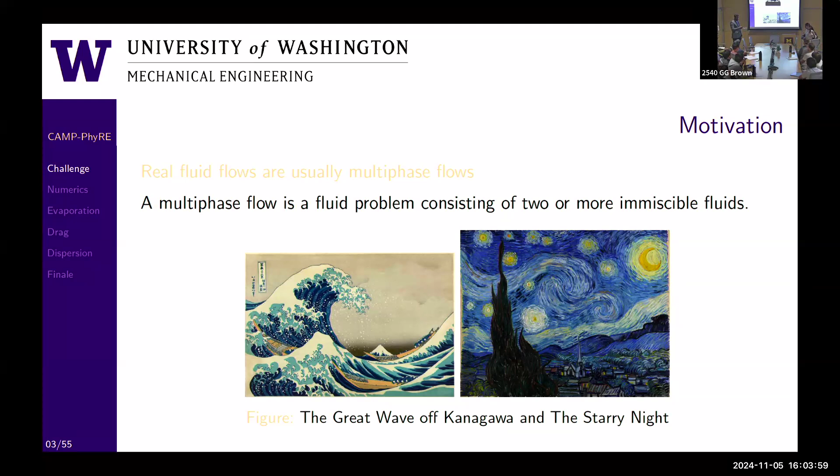In engineering, these occur in a lot of different applications. Most commonly, you'll see this in situations where you need heat and/or mass transfer. I'll list a couple of common engineering applications.

My background is more associated with combustion as it occurs, principally motivated by aviation—you have a fuel which breaks into droplets, and there's gas around it. Fire suppression is another application: here you have water droplets in air.

You can also talk about a lot of chemical engineering systems involving bubbles, where you have a liquid and use bubbles for mass transfer or heat transfer inside the system. And you can even think about blood flow, biomedical devices, biomedical engineering as a multiphase flow—you have a liquid, basically water, with things in it like sugars, cells, and proteins.

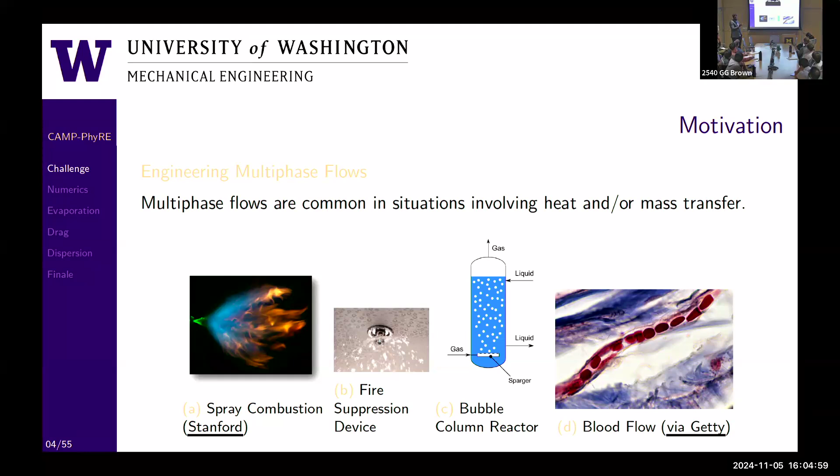My background is more toward the spray combustion angle, so I'll talk about a lot of this in that context. I love this image I've taken from Stanford, where a liquid jet is injected, breaks into droplets, droplets evaporate, and then the vapor, which is a gas, mixes with the air, which is also a gas—that's the multiphase aspect.

And finally combustion results. So this is both multiphase and multi-physics—there's different types of heat transfer, flow dynamics, chemical reactions going on. There's also multi-scale aspects, right?

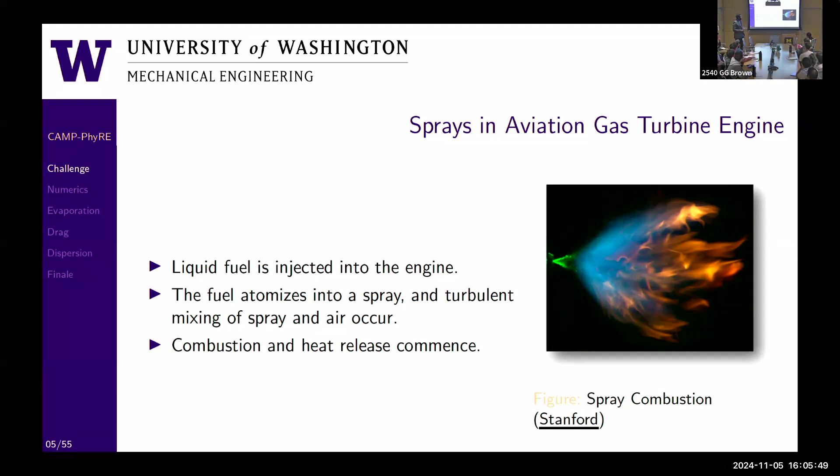It's like the combustor scale perspective of it, but also the scale of an individual droplet, which is much smaller. So multi-phase, multi-scale, multi-physics—a lot of things going on.

A lot of what I talked about in my work relates to the application of sprays. One thing I want to say is that as a matter of practice, we understand sprays by looking at the droplets which consist of the spray, but there's a lot of dissonance between what we know about droplets and what's actually relevant for a real spray.

This slide highlights some of the common points. A lot of the theory of droplets looks at either quiescent or uniform flow around the droplet, but actual spray is turbulent flow. A lot of the theory looks at a spherical droplet, but actual droplets don't necessarily look spherical.

This is a very famous experiment, relatively low Reynolds number too—not even a particularly high Reynolds number outlier type of situation. It's showing the atomization or breakup of a liquid stream into droplets. And if you zoom in, you can see these not sphere-shaped droplets. So droplets are not spherical.

Another common assumption is that there's no flow inside of the droplet, no internal circulation, and that is violated. The shear from the air onto the droplet will induce internal circulation.

Another thing is people are usually looking at isolated droplets—as if this droplet is the only thing in the entirety of the universe, with no interactions with walls or other droplets. That is not accurate for sprays. Sprays are a dense collection of droplets.

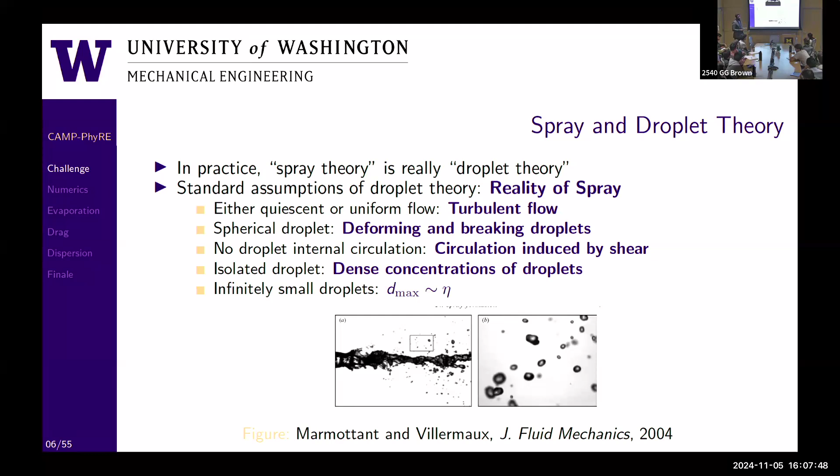And then the other thing, which is kind of subtle, is that either of the theories are assuming droplets are infinitely small. We're going to say, without explaining too much, that droplets can be of sizes that are relevant to the turbulence scale. This parameter eta here represents some type of turbulence length scale, but droplet sizes can be commensurate with turbulent length scales of the flow.

So I'm going to claim that there's a gap in knowledge, let's say, between application and theory. It's largely driven by the fact that we need to know more about droplets, and that's also the goal of what we're mostly studying here.

The foundational idea, or the approach that we have here, is that a lot of spray or droplet theory is basically of the form that your force, evaporation rate, drag, or lift is described by some type of gas phase boundary layer equation. So maybe it depends on Reynolds number. If you're doing heat transfer, you might have something like Prandtl number, a heat transfer number, or a mass transfer number if you're doing heat or mass transfer. I mean, those things are important, but it's not the complete picture.

If you're doing a multi-phase flow, other things will be important that are related to the multi-phase flow: the density ratio between phases, the viscosity ratio between phases, and this parameter called the Weber number, which is related to the shape of the droplets. We showed how those things deform when they're subjected to aerodynamic stresses—that's captured in this parameter.

In general, if you're dealing with a real turbulent flow, not uniform flow, you're probably going to want something that represents the non-uniformity of the flow, like a shear rate. So this is a shear rate. Some of these phenomena have been studied, and what we're doing is improving upon it, systematizing it in a generalistic formulation, and continuing the study in these areas.

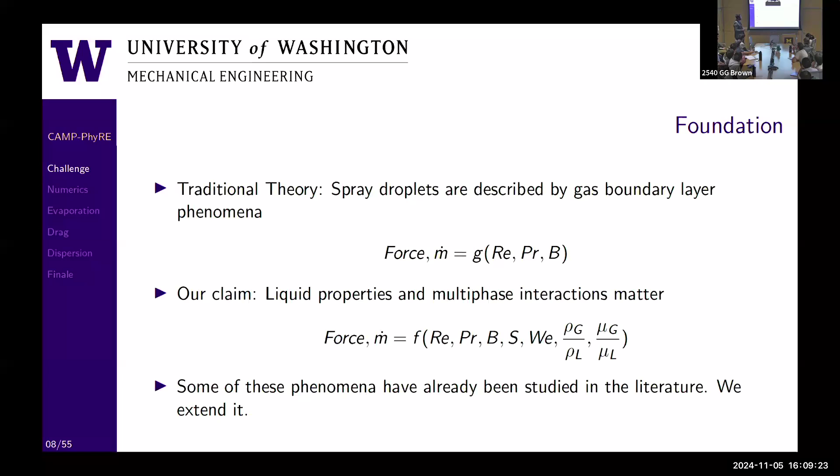How I'm going to break up the rest of this is: I'll briefly talk about the numerical methods mostly developed during a PhD. Then we'll use those to investigate droplet evaporation and droplet drag. And then we'll collect some of those results, think about them, and explore the implications of drag on droplets and their dispersion inside of a turbulent flow field. It'll be homogeneous isotropic turbulence in this case, and then we will be done.

This section is mostly based on my PhD work, just reviewing the numerical method that I developed during my PhD.

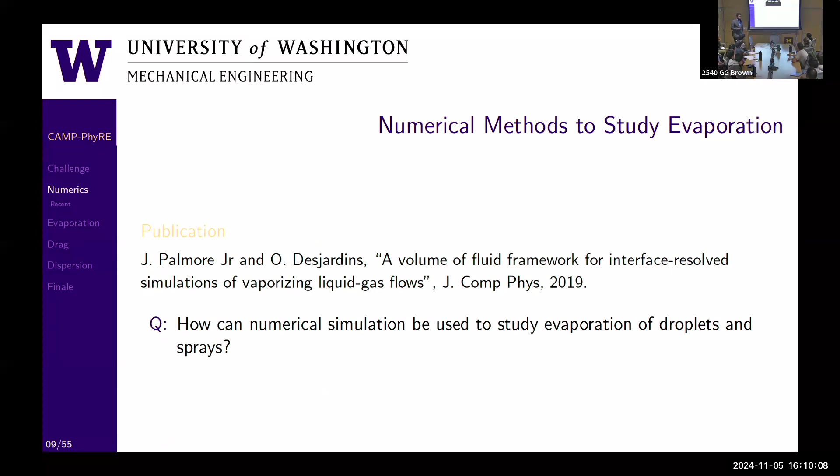So why do you want to simulate spray? We talked before about the fact that it's a multi-scale, multi-physics, multi-phase phenomenon. Compared to experiments, it can be difficult because of the so-called high optical density of sprays, which makes it difficult to use optical measurement techniques. And even if you can make those measurements, sometimes you just want a type of data that's more amenable to CFD, like field data, as opposed to isolated point data.

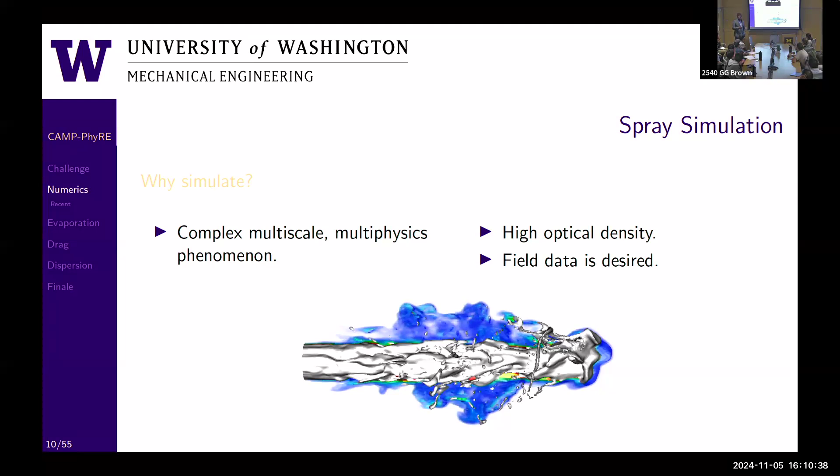Some of the numerical challenges, well, between the two phases, liquid and gas, you got vastly different fluid properties like density, viscosity, et cetera.

This is a 2D slice of a droplet evaporation problem, very coarse mesh, but it's designed to be illustrative. If you look at the pressure field here, this is the droplet, this is the inside of the droplet, this is the air around it.

So if you look at the pressure field here, you can see the pressure is discontinuous at the liquid-gas interface, and that's due to the surface tension. So there are discontinuities in fields such as the pressure. If you look at the velocity, which is the other side, velocity is also discontinuous.

What happens is that evaporation introduces the so-called Stefan flow, Stefan blowing, and that's going to introduce a discontinuous velocity. So you have major discontinuities in your momentum equation from the pressure, and also the velocity itself is discontinuous, and then all of the fluid properties are also discontinuous at the interface.

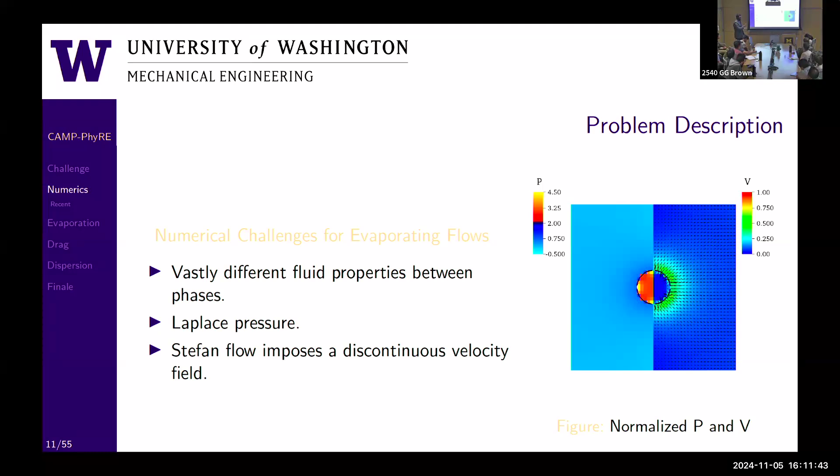For resolving this, our fundamental philosophy was to err towards the side of discrete conservation. If you're familiar with finite volume numerical methods, you might know what some of these things mean. If you're not, it's not super important, we'll just go through these things quickly.

I use an unsplit geometric volume of fluid method for liquid tracking, or liquid indicator, that has a property of being bounded and discretely conservative, which again is a relevant property that you want to have.

We built it on the NGA code, which was a solver that discretely conserves the mass, momentum, and kinetic energy in each phase separately. For the phase interface, you had to implement a lot of fixes to be able to deal with that in a way that was accurate and stable.

So we chose a mass, momentum consistent dissipative scheme to use at the interfacial cells. And then for the pressure solution, we used the ghost fluid method, which allows for a sharp representation of the pressure discontinuity instead of spreading it out over several computational cells.

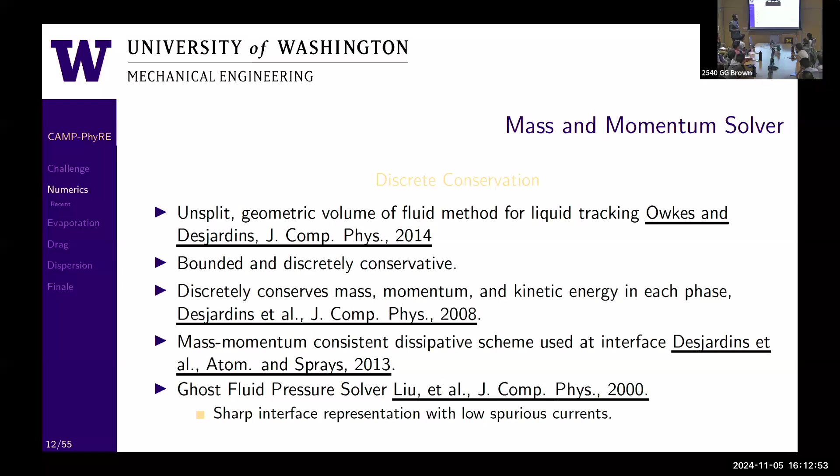For scalars like temperature field and vapor field, we use an approach called BQuick, basically, which is based on the quick scheme, which is third order accurate. But then at locations of discontinuity, it degenerates to a first order upwind scheme to maintain stability. And then for most of the diffusion operators, we just use second order central difference schemes.

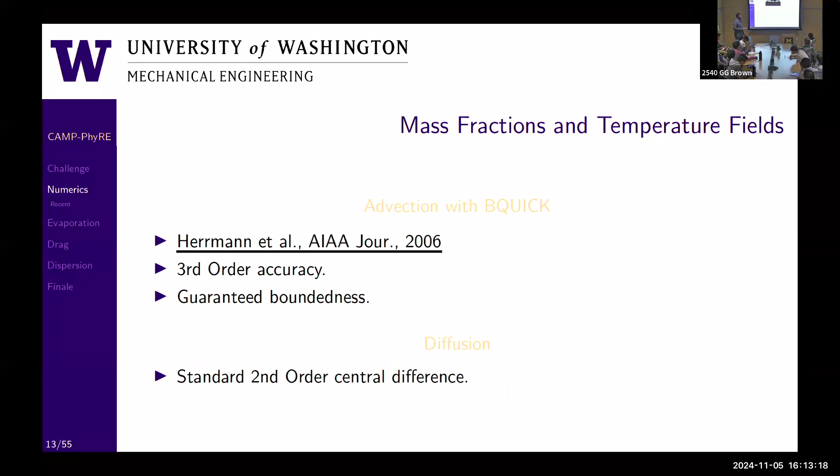So really what I actually spent a lot of my PhD thinking about was what is M dot, being the evaporation rate. So I'll talk about that here. The idea is evaporation rate can be predicted from the energy conservation equation or from the mass conservation equation. In reality, both of these things have to be satisfied simultaneously.

There's an additional relationship where the temperature and the vapor mass fraction are linked through some type of thermodynamic equilibrium relationship, like the Clausius-Clapeyron relationship at the interface. So all three of these equations have to be satisfied simultaneously. If you stick them together, you get this nonlinear solver that you have to solve that will simultaneously give the evaporation rate, the temperature, and the mass fractions.

We spent some time investigating this and looking at various strategies, understanding which one is more or less accurate, which one is more or less stable, which one is more or less robust, et cetera, et cetera. So I spent a lot of time doing that.

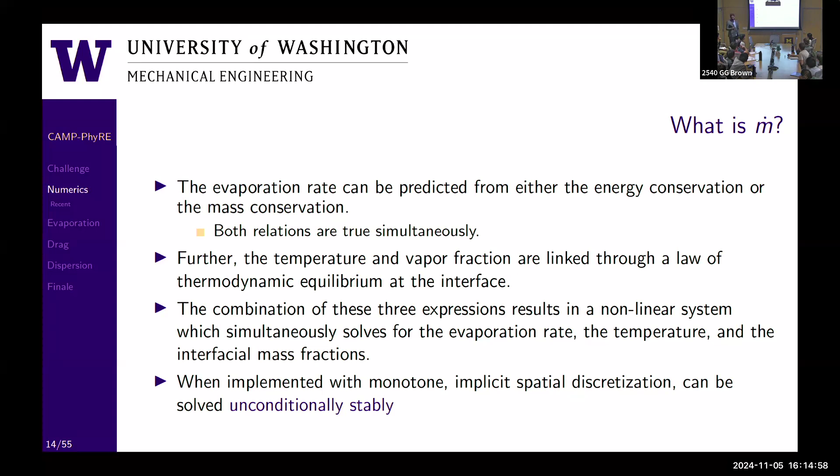Based on how I implemented it, I was able to get a scheme that was not only stable enough, but was unconditionally stable, and not just theoretically unconditionally stable. If you're familiar with numerical schemes, you'll know you can easily prove that something is supposed to be unconditionally stable, but then if you actually try it, it doesn't work for high values of your parameter, which I'll call the CFL number. I actually tested this at CFL numbers of like 16,000 or something, and I was still seeing good results, so I was like, okay, this is actually unconditionally stable.

Okay, so then results: unconditionally stable, proven convergence against analytical solution, first order. At the time, people were not even proving that their schemes converged, they were just like, yeah, we have evaporation, great. So we were proving actually that we can converge. First order is better than not proving any convergence at all.

Our convergence was in the infinity norm, meaning the maximum error was actually converging. Most people look at the average error, but if you zoom in, you'll find the error is decreasing far from the interface, while near the interface, the error is not converging at all.

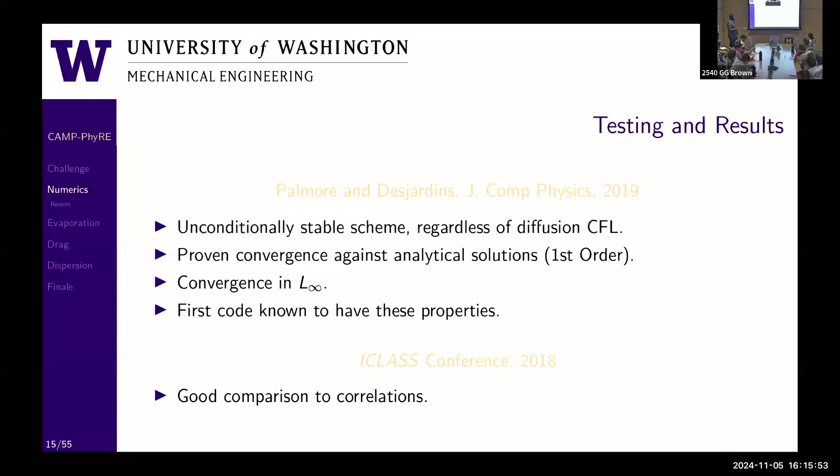Very nice, and I did some further validations later. Okay, so that was the numerical scheme. Now for the rest of the talk, we'll talk about how we use the schemes, not necessarily the numerical details.

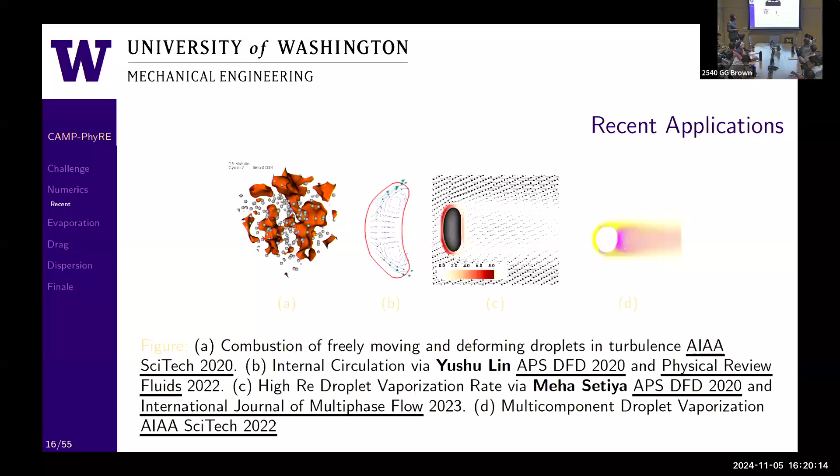Okay, so the next part is mostly work from Meha, looking at droplet evaporation. Basically this type of analysis, trying to understand how the fact that the droplet is not a perfect sphere is affecting the evaporation.

So to start off, I actually investigated this analytically. I enjoyed doing that, it was fun, I learned a lot of math. The key thing here was I investigated the effect of the shape on the evaporation.

The shape is mostly governed by the Weber number, which is the ratio between aerodynamic and surface tension stresses. Zero Weber number is basically a sphere. Larger Weber numbers, you see them deform into more complicated shapes and eventually break into smaller droplets.

There's a lot that's known about droplets, including that at small Weber numbers, droplets tend towards being ellipsoid-like shapes. This has been studied. However, the real droplets are not actual ellipsoids, they're just ellipsoid-like shapes. So I was curious about how the results would change if we did something a little bit more realistic rather than an ellipse.

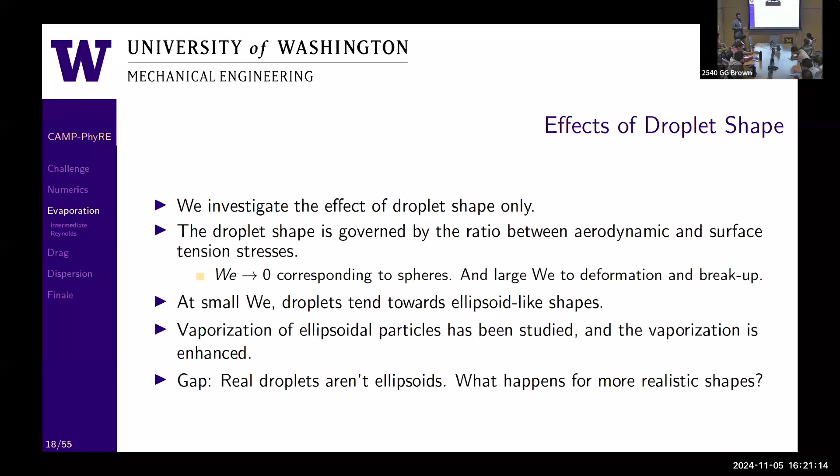Again, I did this analytically. So I solved the steady state version of heat transfer combustion equations in spherical coordinates. I assumed that we had axis symmetry, so this is really just a function of the radius and the angle.

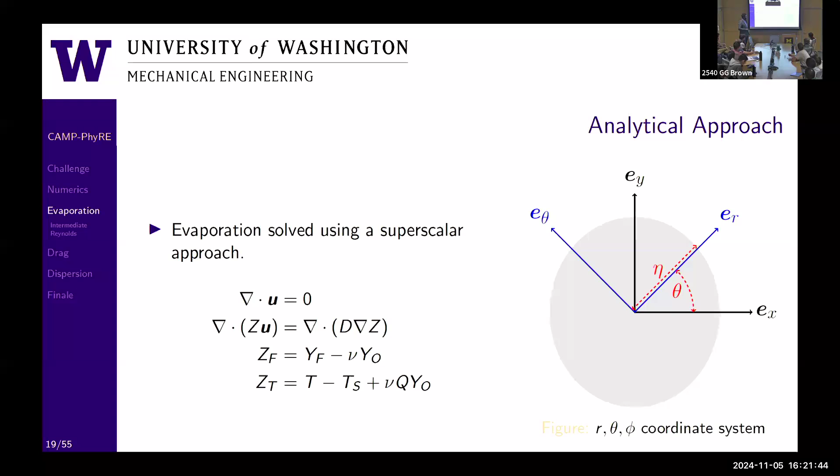To describe the interface, I have this parameter eta, which is basically like the effective radius as a function of the angle. So here eta would be smaller, here eta would be larger, like this type of thing.

And then I can write eta using spherical harmonics. This is a perturbative strategy, so I have a perturbation parameter epsilon that I use. I'm assuming the shape is nearly spherical, but it's not spherical.

I don't have to assume that the droplet is symmetric, which is an advantage over ellipsoid modeling, since real droplets actually are not symmetric. This is known.

With the simplifications I gave, spherical harmonics can be expressed really using Legendre polynomials, which is what I got to here. And then a key aspect was I used this existing solution by Taylor and Acrivos, who had done a separate study for a droplet free falling at low Reynolds number.

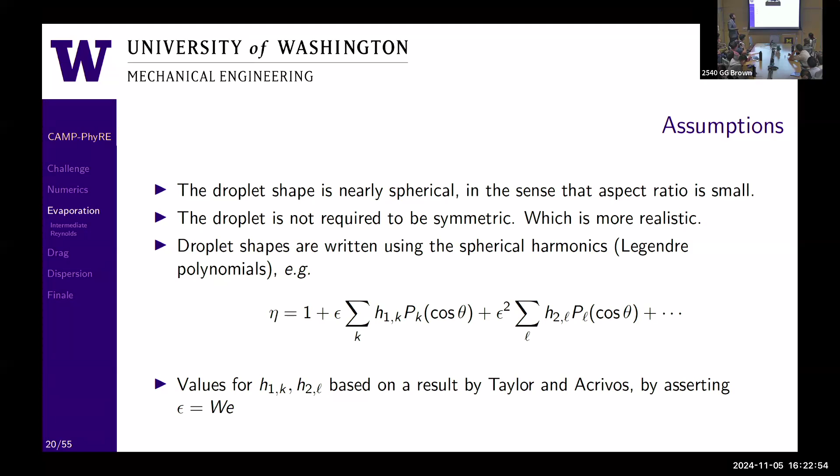They basically found out what these parameters H should be for that situation. So if I make my perturbation parameter be the Weber number, then my study lines up with theirs, and I can use their results to start. That's what I did, and I got this type of result.

Non-spherical droplets vaporize faster than spherical droplets, specifically this equation, where this is the solution for a spherical droplet. And you can see this function of Weber number.

Some interesting things about it: there's no first variation term, I thought that was interesting. The enhancement is quadratic, or it starts off as quadratic and has a cubic term, so there's no linear term.

I liked that the result in the end was something that could be written only in terms of Weber number. You didn't need to do some fancy integral of the angle or anything like that. Weber number is a very easily measured parameter just using the fluid parameters and velocity.

So you don't need to, like, if you wanted to actually compare it to an ellipsoid, you have to take photographs or something in order to understand how it's deforming. With this theory, you can just use the Weber number.

We also investigated the reason why vaporization was occurring, and one of the results was that the enhancement of vaporization is not related to the change in area. It's specifically related to the local interface curvature of the droplets. This was all shown from the analytical theory.

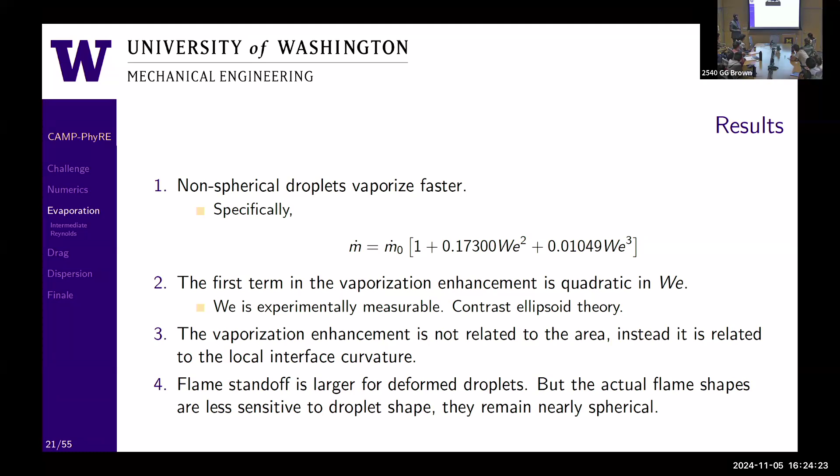I kind of spared you showing all of those things in detail, but you're perfectly free to read the paper if you want. It also did some results for flames, as in combustion. So using that, we went on to actually use

our numerical method that I talked about before to investigate the question of: well, asymptotic theory is correct for small Reynolds numbers, small Weber number. What happens for a larger Reynolds number, larger Weber number, that might be more realistic to a real system? So that's what we used the high fidelity code for.

This student, Meha, chose to investigate this for n-decane, which is a common fuel surrogate, used for both gasoline fuel surrogate and aerospace fuel surrogate. We investigated this at a particular condition for pressure and temperature, meant to be closer to an aerospace type of configuration.

We wanted to do this, but we also didn't want to do a naive parameter study because these are very expensive simulations. So we had to think about what phenomena were controlling the physics of this problem and limit ourselves to investigating the ones we thought were most relevant.

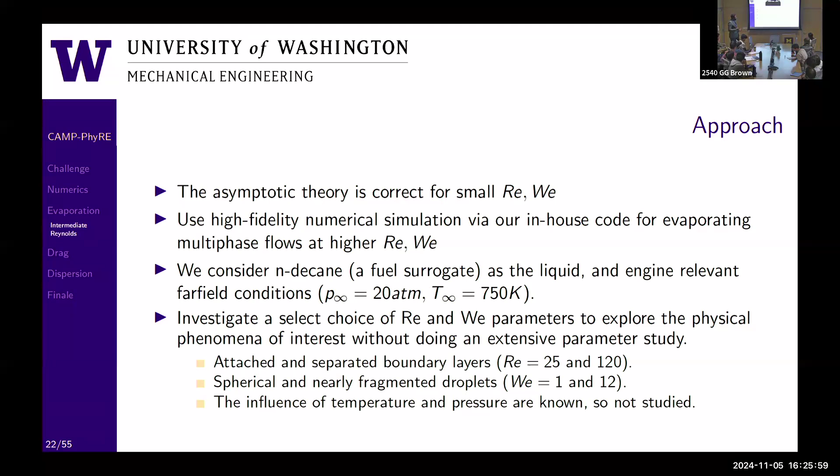We thought maybe boundary layer behavior was important, so we chose a couple of key Reynolds numbers. Reynolds number 25 is for a sphere we thought would be fully attached, and Reynolds number 120 for a sphere we thought would be basically fully detached. For the Weber number, Weber number 1 is very close to being a sphere, and Weber number 12 is about the largest you can get without the droplet fragmenting. So we looked at a couple of Reynolds numbers and Weber numbers within that range.

This is the configuration. I have a droplet inside of this domain. It's initially spherical, and over time, due to aerodynamic stresses, it's able to deform. Airflow is going that way, and we've made gravity in this direction. The strategy mimics the free fall of a droplet at terminal velocity, so the gravity in the simulation is arbitrarily chosen so we can get whatever terminal velocity we want.

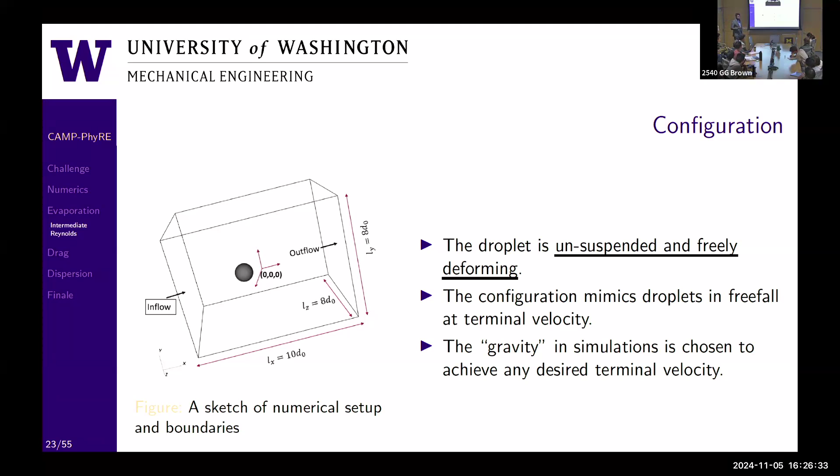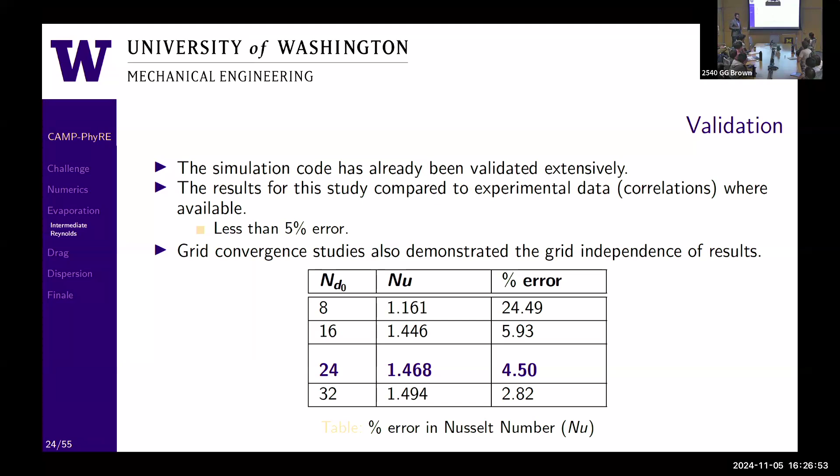She did some validation comparing a result for a spherical droplet, a low Weber number droplet, to existing correlations, and got reasonable error depending on the mesh size we were using. So we felt our mesh was refined enough that we could use it to do additional studies, and we went on to do them. This is a summary of our result.

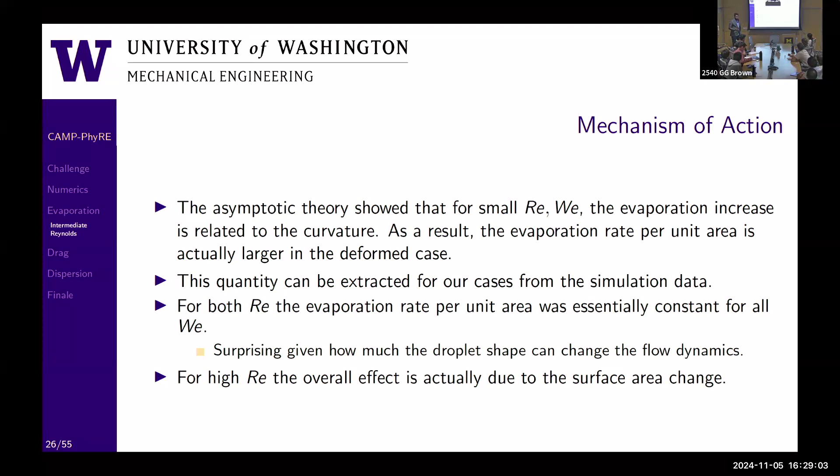That's okay—let's just work to explain what we actually have here, not try to shoehorn our beautiful theory into it. So we investigated this in more detail, and what we found was some type of balance between interface curvature and boundary layer separation.

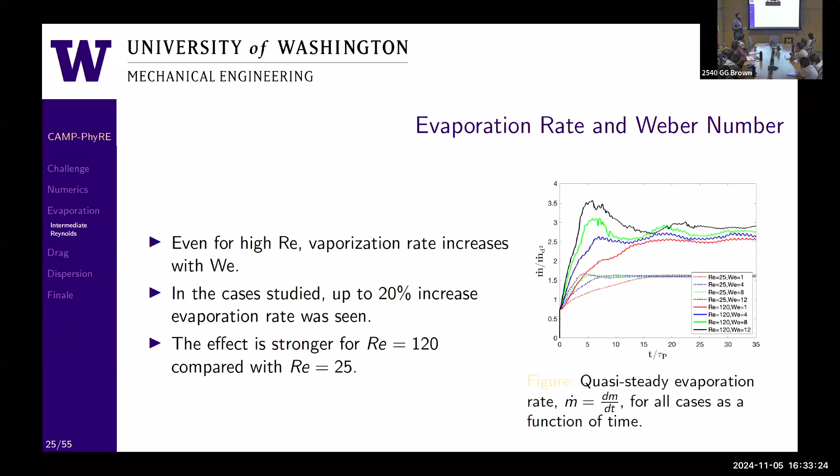One thing I didn't say, which is probably important, is that because this is numerical, I can evaporate without losing mass. I can basically turn off the mass loss of the droplet. So these droplets all have constant mass even though they're evaporating. That way we're not running into an effect where one droplet evaporates faster than another, and because of that has a different effective size. So we don't know whether it's the size, the surface area, or the curvature causing the effect. We eliminated that by doing this type of quasi-steady evaporation.

Any other questions about this part? Yeah, I imagine there are other parameters though, there's Weber number, but there's gotta be Schmidt number too, right? The effect of the diffusivity of the scalar. So how do you choose those parameters? The reason I chose Reynolds number and Weber number - Schmidt number is important, Prandtl number is important - but taking it back to the theory we already demonstrated, people already treat those as important parameters.

So the purpose of this was to show how the multi-phase aspects add something to it. But there is some dependence, because that'll control the gradient. Yeah, so those parameters are important. Those are just fluid property parameters.

As long as we ran the same density, viscosity, diffusivity, which is true because we're using the same fluid, you'll get the same trend regardless of what those are, because you're just isolating the deformation due to the surface. So those are important parameters, but we use the same fluid properties, so those are automatically constant in this situation. Really this is just demonstrating the importance of some of the other parameters, like surface tension, for predicting this.

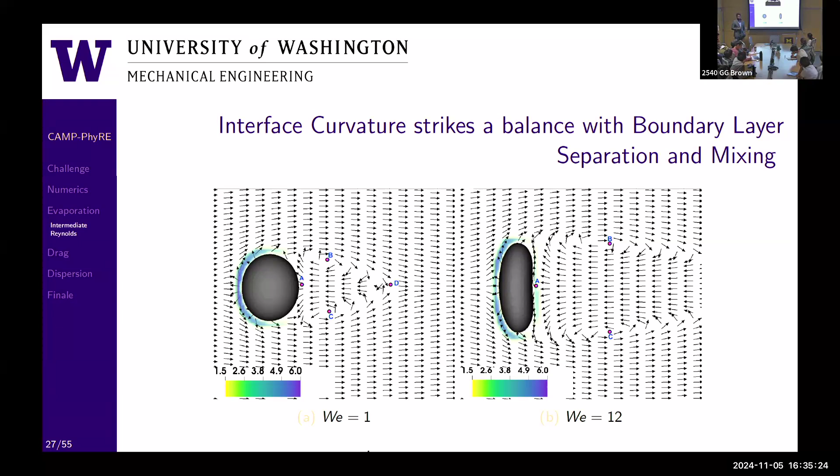Yeah, so I'll go on. This is the result, okay, we don't need to summarize it, we just looked at it.

The other thing we looked at was droplet drag. It seemed obvious in retrospect after doing the study, but when we were doing the droplet evaporation studies, we found the droplets were moving around in ways we didn't anticipate, and we couldn't get them to have the terminal velocity we expected. That inspired us to think about how the drag itself is being changed by these same parameters we were investigating for evaporation.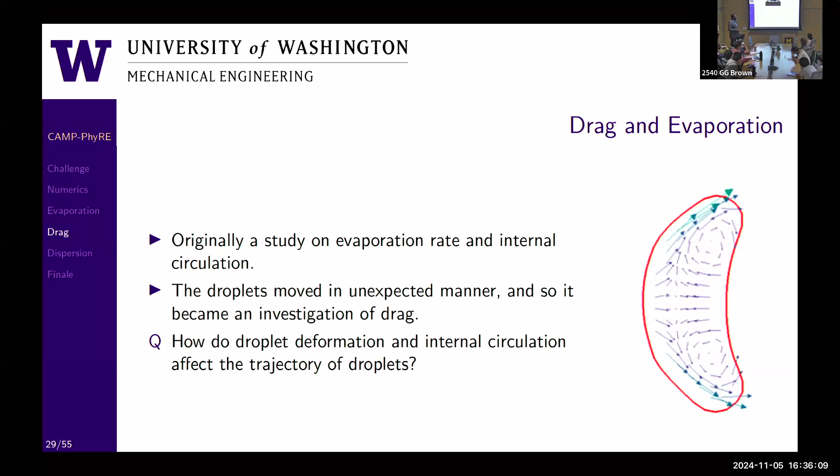Okay, and my student Yushu has been doing a lot of work on this, same configuration essentially. I like going to theory, so this is a theory that Yushu kind of came up with. He was taking a class on interfacial mechanics and had to do a class project, so I said, can you make your class project relevant to the research? And he said, you betcha, here it goes.

This ended up being published along with other things in Physical Review Fluids, the APS journal. So what he's saying here is that to calculate the drag coefficient of a deforming droplet in an effective manner, you probably need to know what shape it actually is, which you can characterize by an aspect ratio, or if you assume it's nearly ellipsoidal, instead of aspect ratio you can use the eccentricity.

From an energy perspective, you have the gas inertia and the liquid inertia and the surface tension forces, or surface tension energy, all balanced. Then he writes these expressions, and making various substitutions and rearrangements of all of these, eventually he gets this, which is a nice equation.

What we're showing here is the relationship between the Weber number, the eccentricity, and also the density ratio that we talked about before, and the viscosity ratio that we talked about before. Interestingly, these two parameters seem to be grouped together in such a way that they are equivalent to the Ohnesorge number, if you're familiar with what that is.

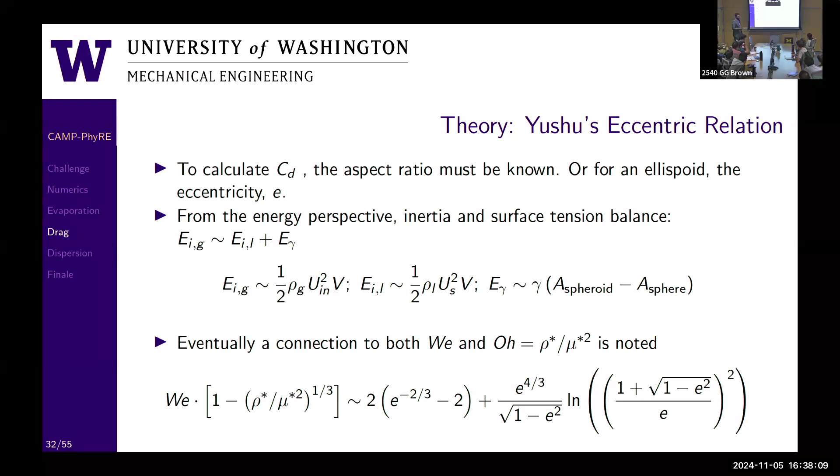So based on this insight, we were doing some simulations and we tried to actually investigate some of the effects of those parameters. So he, in this case, looked at the density ratio and the Weber number.

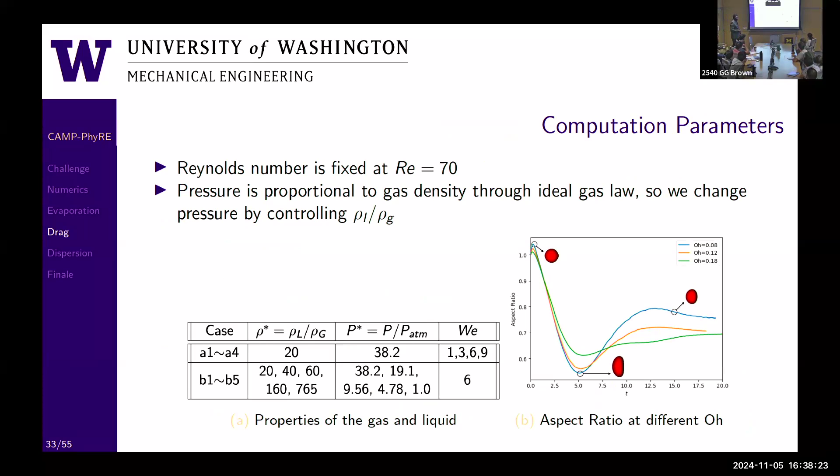The reason we looked at the density ratio is because changing the density ratio promotes internal circulation inside of the droplet. And that naturally leads you to ask the question, how do you measure the internal circulation?

Originally we looked at the maximum velocity. Maximum velocity is a very sensitive parameter. If you just check maximum velocity, you'll see a lot of anomalous spikes and dips. So we needed some average parameters that can measure internal circulation.

So we looked at several of these in our AIAA SciTech conference paper: mean vorticity, mean absolute value of vorticity, enstrophy, and a parameter I made up called Hill's constant. If you're familiar with the Hill solution to spherical vortex, that solution has a certain constant related to the vorticity that describes basically the entire flow field.

If you assume that's accurate even for non-spherical droplets and use the same strategy, you can back it out and solve for that constant. So I call it the Hill constant.

We're still not convinced what's the best way to measure internal circulation, but we're seeing this monotonic trend in all cases, which is what we actually care about. So you have black, red, green, orange, blue — in all cases you're seeing a monotonic trend that as you change the density ratio or pressure ratio, there's an increase in the parameter, and all of them have the same monotonic trend. So without discussing which one is the best measure of internal circulation, we can clearly see there's a clear relationship between density ratio and internal circulation, which is what we wanted to prove.

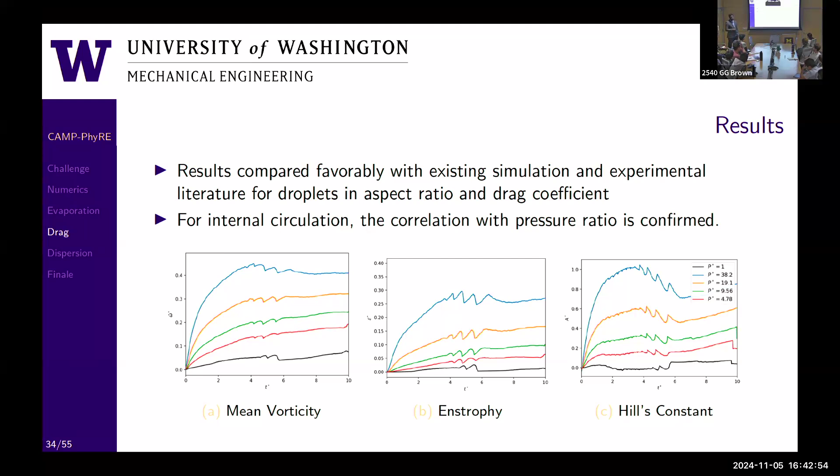Well, it's good. So we measured the drags, and what we saw, if you look at the raw data - dashed lines are raw data, solid lines are corrected data - we saw a significant effect, in this case of Weber number or droplet shape, on the drag. But if we measured the actual frontal area of the droplet and normalized it, then all of these curves collapse. That's actually kind of weird because we still use the drag coefficient of the sphere to calculate this, but we didn't use the drag coefficient of the disk or anything like that. It's actually kind of weird that they collapsed so well, but apparently they did.

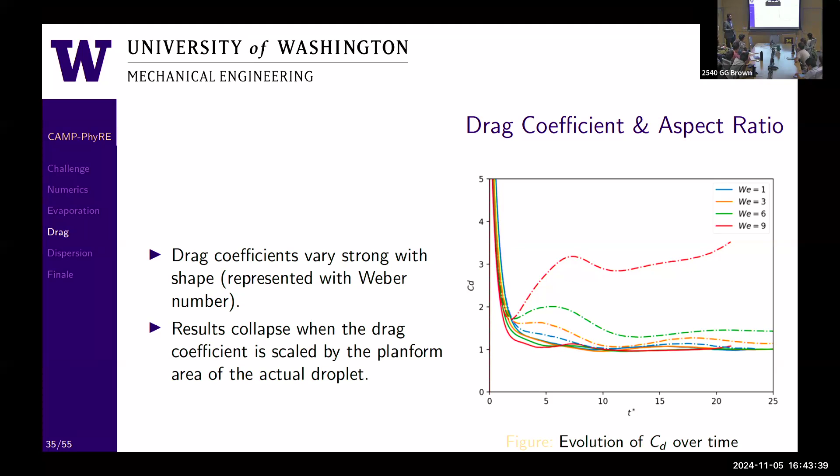And we tried to do the same thing for our study of internal circulation, and you can see a similar result, but the collapse is not as great. So there's more variation. There's something else that is important that's driving the drag effect for internal circulation. It's not merely the shape of the droplet.

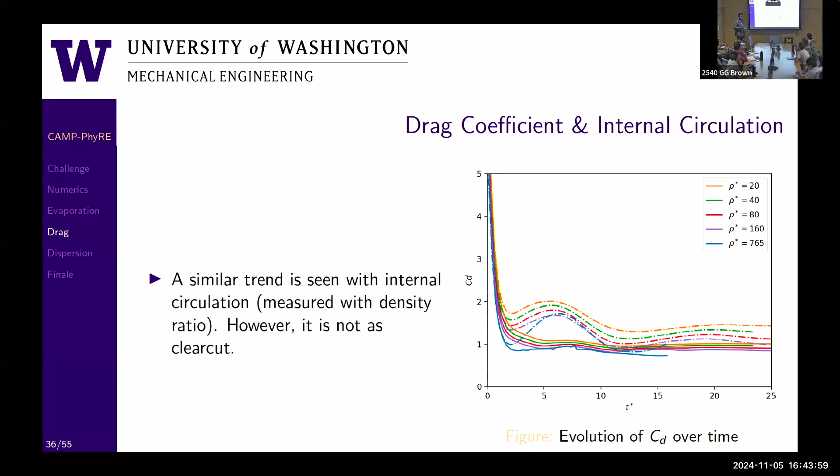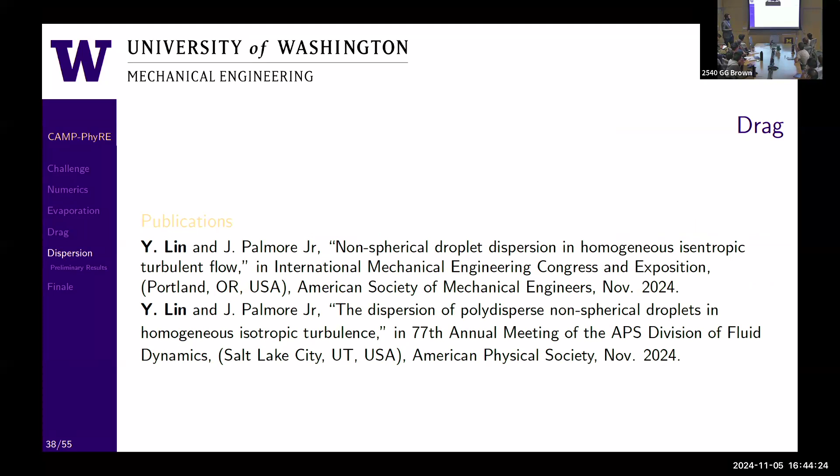Okay, so I see that I'm getting close to the end of my time. So I think really what I wanted to talk about today was a more recent work of the same student, Yushu, and how we've expanded that. He has this paper at ASME soon in Portland, and then also at the upcoming APS conference. The idea here is that we're going to take some of those results and understand their implications in turbulent flows.

For example, we know the droplet deformation increases drag. Well, what that's going to mean as a practical matter for spray is the trajectory of droplets is typically miscalculated in spray - the physical location of the actual fuel is not known. Because the droplet deformation increases the droplet evaporation rate, that's going to mean that the vapor concentration and vapor mixing are miscalculated, so the combustion is not known.

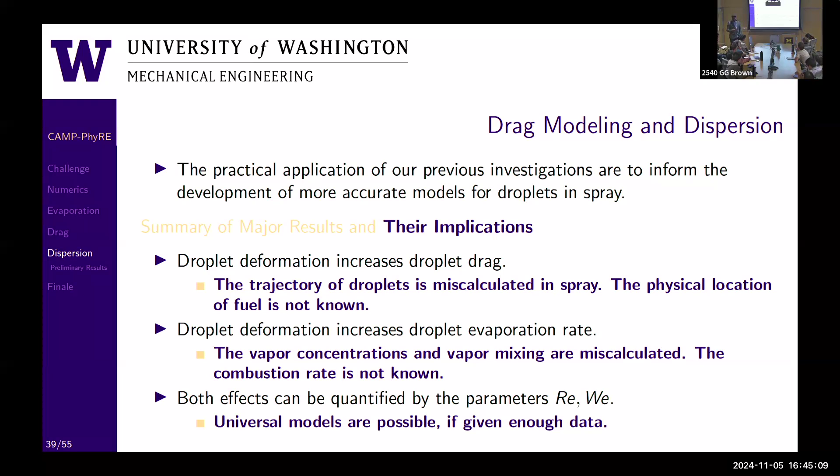And then the other thing we kind of notice is that these effects can be quantified by parameters like Reynolds number and Weber number. That means we can have universal models of this - universal meaning basically non-dimensional number models of these things. So what we did here was we took one of the drag models for non-spherical droplets, and we put spherical droplets in homogeneous isotropic turbulence and freely deforming droplets of the same size in homogeneous isotropic turbulence, and then compare their dispersion.

Okay, and to talk about the dispersion, we introduce a couple of parameters that are probably well known to people who study particle-laden flows. So we have the particle autocorrelations, and we have the dispersion, or the mean square displacement, which you can calculate from the autocorrelation.

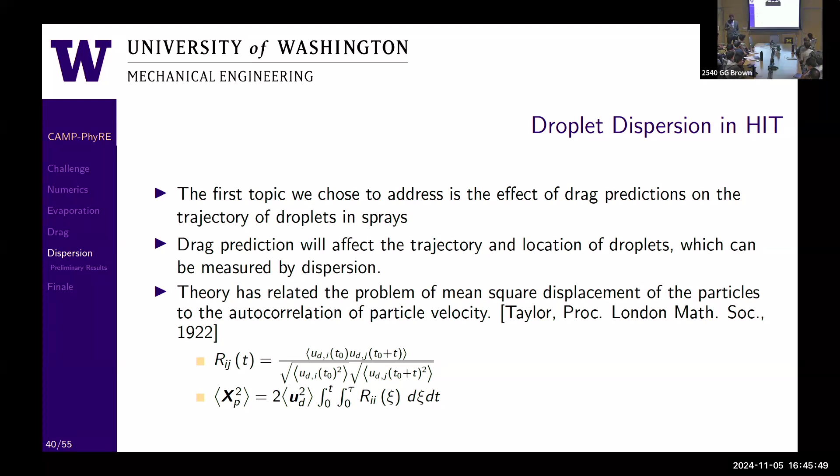Okay, and in this case, we solve the droplets using a Lagrangian particle simulation approach rather than an interface capturing approach, if you're familiar with that. In that situation, the gas field satisfies standard Navier-Stokes equations, whereas the liquid field is considered to be isolated droplets that satisfy something more like Newton's law: the position derivative is the velocity, mass times acceleration is your force. In this case, the only force is the drag. So the force is the drag.

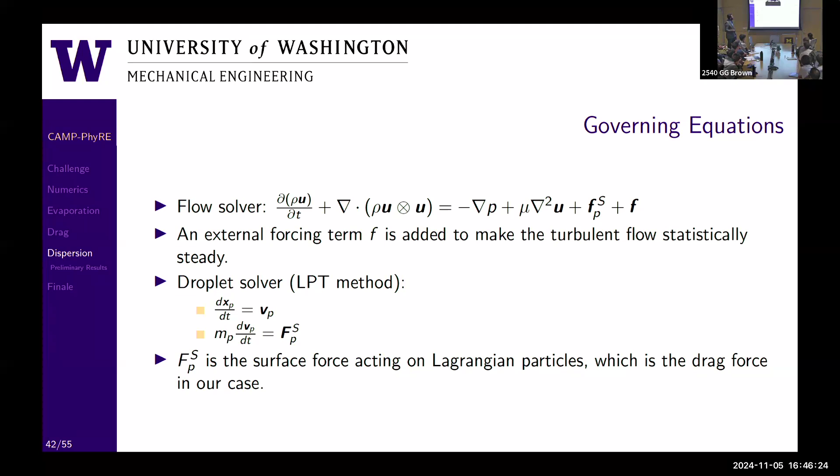For the drag, we took the classical Schiller-Naumann relationship to represent spherical droplets. For non-spherical droplets, we used an existing simulation database from Hellenbrook and Edwards to get a drag correlation, where the drag depends on the aspect ratio, the viscosity ratio, and the Reynolds number of the droplet. The aspect ratio itself is a function of the Weber number, so that ties it back into everything we've done previously.

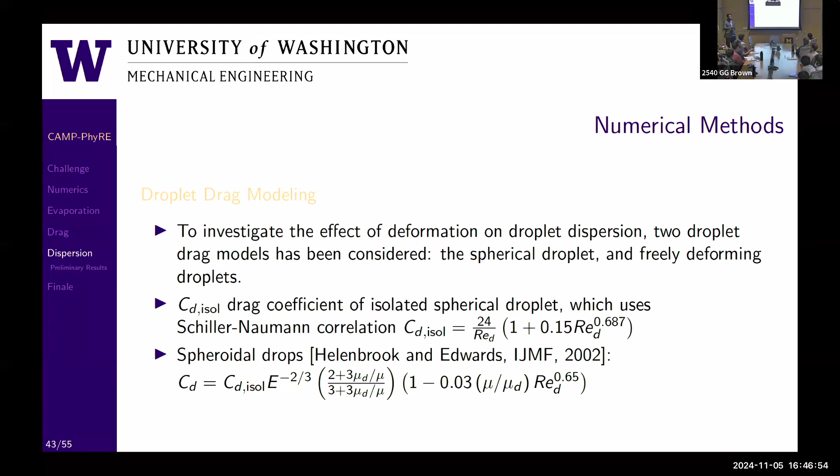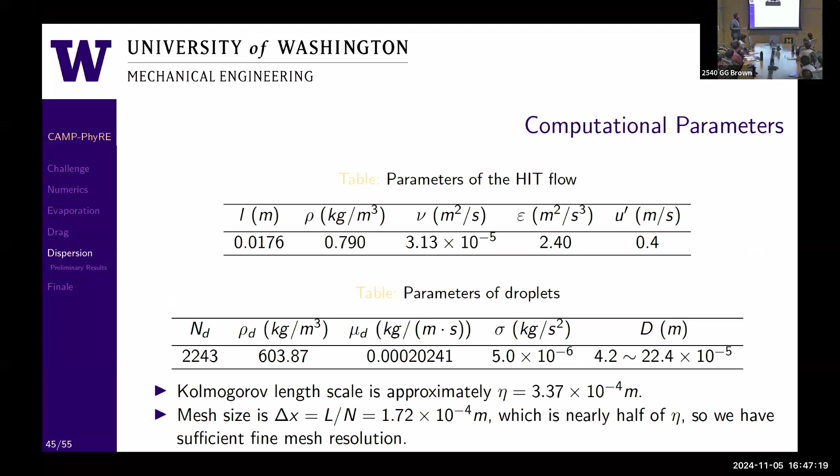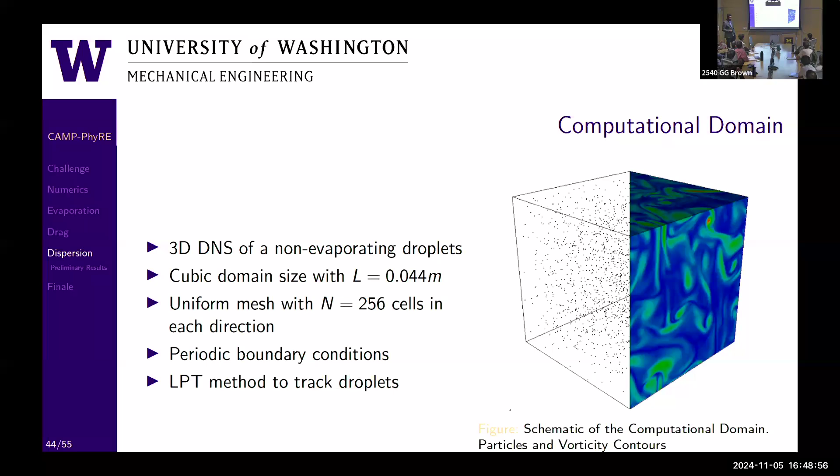We aren't quite sure how to interpret the data beyond this yet, or even if it makes sense to interpret it beyond this, but we decided to show it. Maybe some of you have some ideas.

So what PK Yeung does when he looks at dispersion is he has periodic boundary conditions for the fluid, but not for the particles, so they escape and disperse out. As they move further out, you always know the fluid velocity field because it's periodic. You have an initial clump of particles dispersing out, and you can go indefinitely outward. You just don't apply the periodic boundary conditions to the particles, and when you know the particle location, you can figure out the fluid velocity by knowing the periodic length of how far it's going.

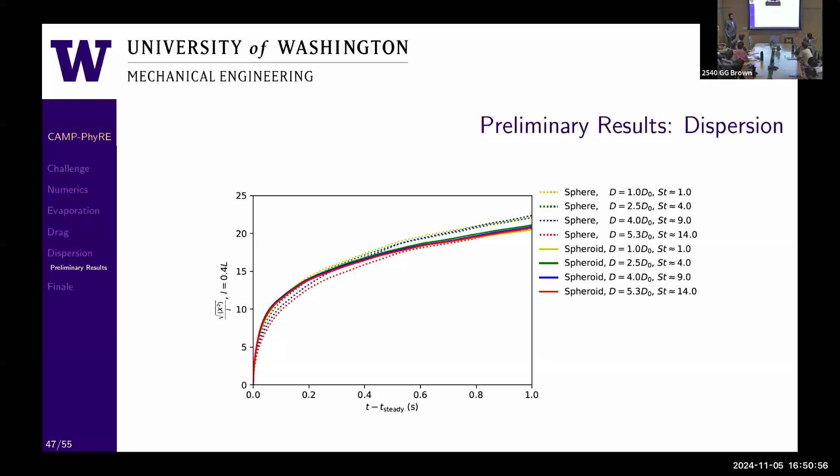That's interesting, we might actually do that. There might be some way of saving this data. You could use the exact same data, you just have to not image it back, but you have to know if the particles did pass. It actually might be tricky. This is a four-way coupled simulation, isn't it? Yes, this simulation is four-way coupled, so that won't work in a four-way coupled setup—you need to treat the force on the particles. That's right, it would only work with one-way coupling. I see, that makes sense. So what you'd do is have a big domain, start particles near the center, disperse out until they reach the boundary, and remove them once they leave. Yeah, this is why we're here to discuss this type of thing.

Sorry, the spheroids—are they dispersing faster? Yeah, the spheroids, those are the ones that are not spheres. Yeah, maybe we should change the terminology. But it must be due to alignment, right? Is that what you're getting to?

Yeah, we still aren't exactly sure what causes the dispersion. So you're saying people look at rods in turbulence, they tend to align preferentially. That could then affect their local drag, so you can imagine particles sampling different parts of the turbulence, aligning and moving faster out. If you're capturing those effects, that might be what it is. Yeah, that's a good hypothesis.

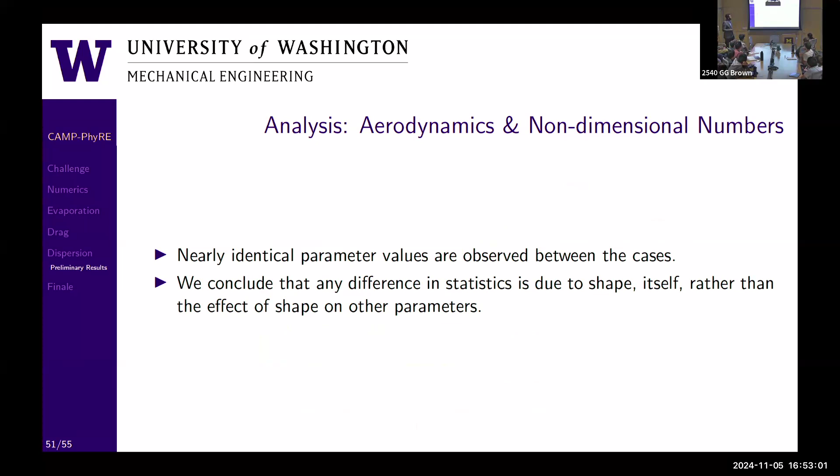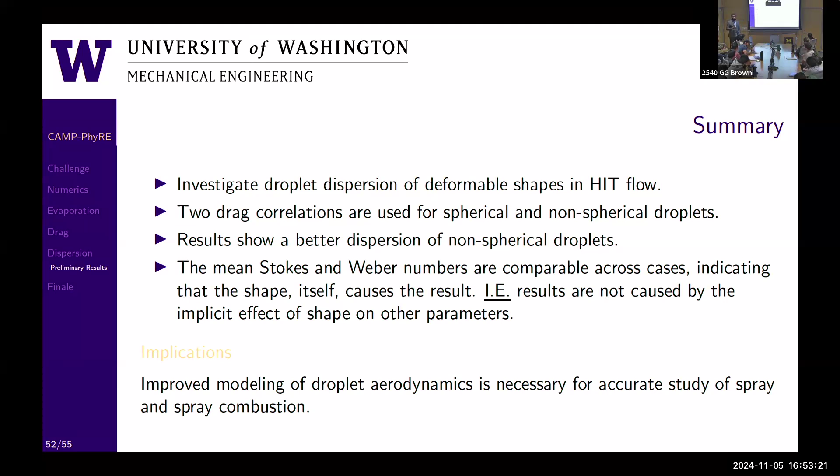As far as this initial result is concerned, that's actually it. We have more dispersion, and this dispersion is directly related to the particle shape and its effect on the drag. It isn't caused by some implicit parameter where the shape changes the Stokes number and the Stokes number changes the trajectory, or the shape changes the Weber number and the Weber number changes the trajectory. It's in some way directly related to the properties of the drag. That was the final result we had there.

Overall summary: we basically did a lot of studies based around the idea that standard theory of droplets and sprays makes a lot of incorrect assumptions. Using theory and numerical simulation, we can relax these assumptions and get a better understanding. So droplet deformation increases the drag and enhances the rate of droplet evaporation, and more practically, a noticeable effect in droplet dispersion appears when doing this in turbulent flows. We're planning to do evaporation as well, so we'll be able to prove the effect this had on fuel mixing. I think this is going to make it more practical. That's the idea—we started from a very fundamental, interesting idea, and we're trying to build up towards how you'd actually use this and why it matters for your engine.

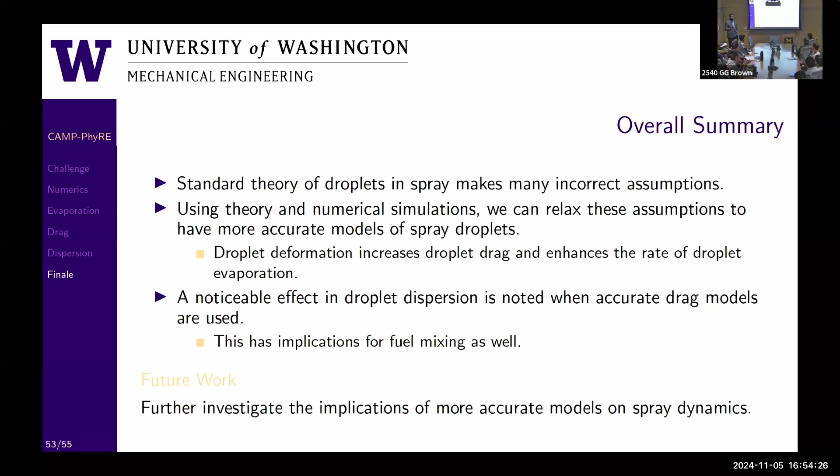People have been asking questions as we go, but we'll have more time for questions now.

Any questions? So you introduced that non-dimensional number, OH. What was the circumstance that non-dimensional parameter originally arises from? Because I think it was like the density ratio divided by the viscosity ratio squared. But if both of those ratios are already non-dimensional, what is the circumstance that requires that form of the ratio of ratios, so to speak?

Right, so originally it wasn't a ratio of ratios—it's just that for our case, based on how the problem is non-dimensionalized, that ratio is equivalent to the Ohnesorge number. The original application of the Ohnesorge number was for droplets, like an ink droplet falling down. Originally it was designed to measure that, and it's supposed to be a ratio of surface tension and inertia of the droplet. The time scales work out in a manner such that it ends up being equivalent to that.

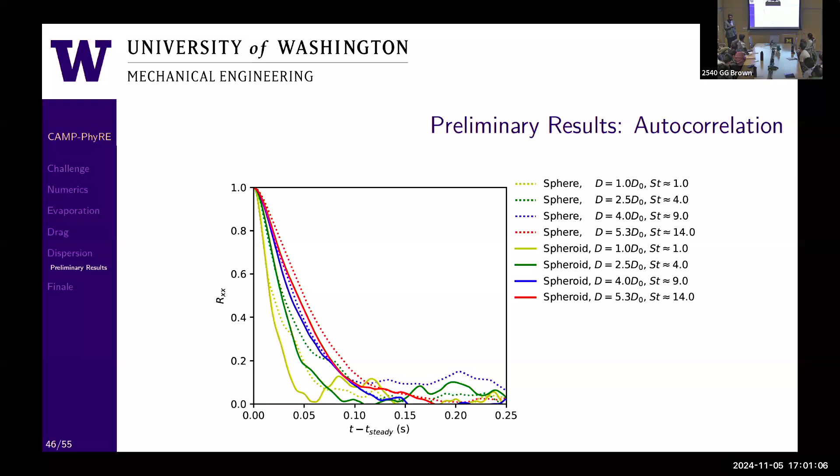Is the standard deviation also the same between spheres and spheroids? We've never calculated it, but I'm very interested now in calculating that. We've literally never looked at any of the statistics other than the mean, because the mean is kind of all we need to calculate things like this. But dispersion is literally the mean square displacement, which is related to a standard deviation. Yeah, we computed it from this, which is also kind of a second order parameter, as your point - it's the mean of a squared velocity, basically. But we haven't looked at any statistics like standard deviation, skewness, kurtosis, or any higher order statistics.

So yeah, I think that might be a really good thing to show. Maybe the standard deviation, even though the mean is the same, maybe standard deviation is much larger, or it's skewed towards one side - maybe there's some type of skewness in the distribution.